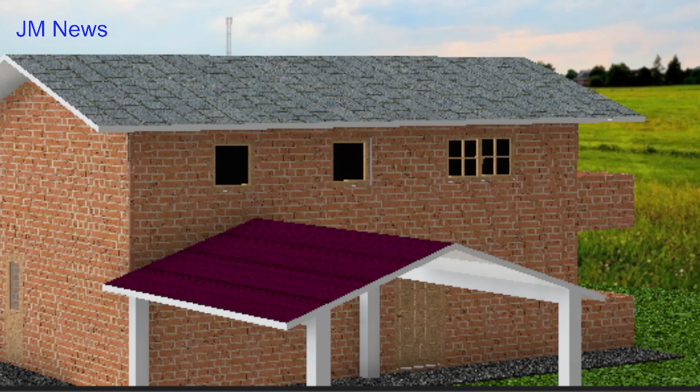Today we will teach you how to install a TV antenna on the roof of a family home. To perform the installation we will use a J-mount bracket, universal for antenna. So don't miss out on the content of this video.

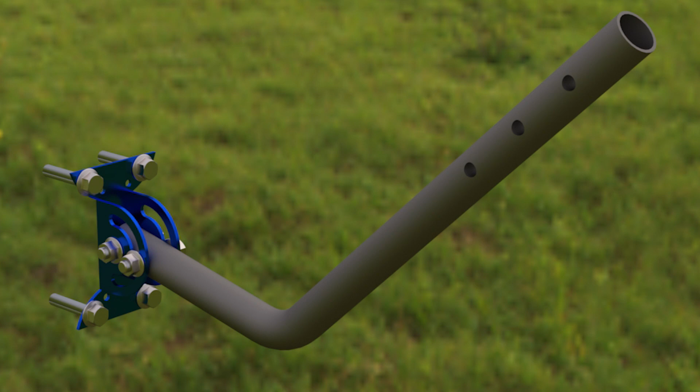This installation will use a universal antenna J-mount bracket. One of the advantages this J-type support allows us is that we can orient the antenna more easily.

The steps we will carry out for the installation of the universal J-type support on the roof are the following. First step: we will make a cardboard template, taking the sample from the base of the J support. Let's see an example of the base made with cardboard. We make the 4 holes to facilitate the work when we use the electric drill to make the holes in the roof of the house.

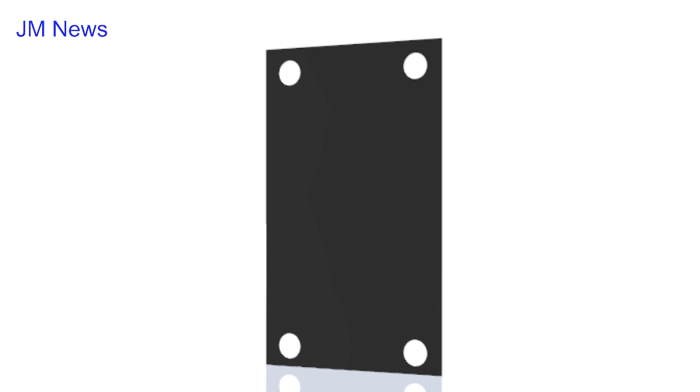Second step: it consists of placing the cardboard template in the area of the roof where we will place the J-type support. Next we will use the electric drill with the appropriate wall bit for the expansion bolts we are going to use. We will make the 4 holes indicated by the template.

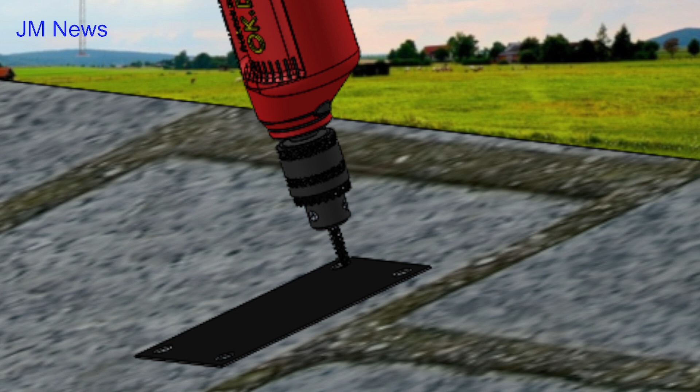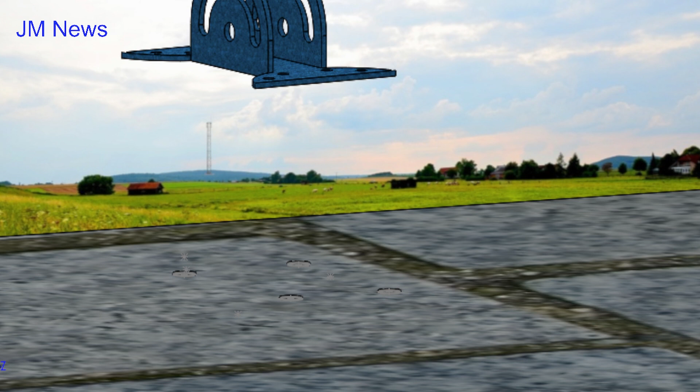Third step. A: we place the lead expansion anchors we have. B: we take the base of the J-type universal support and locate it where we marked the holes. C: finally we place the 4 hexagonal head screws and tighten.

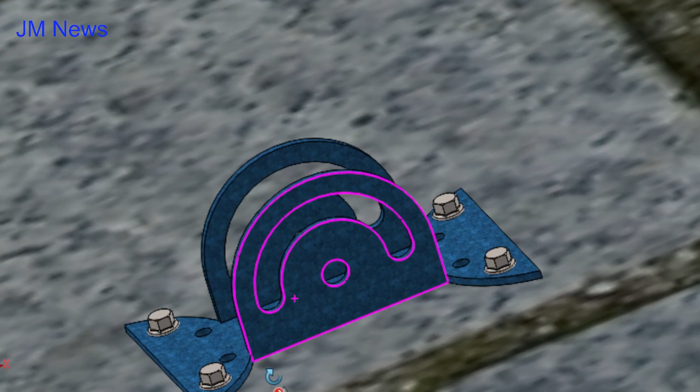Fourth step: we selected the J-type tube, which is approximately 20 inches long. Locate it on the base rail. Put the bolts or screws together with their nuts. Now perform a movement test of the J-type bracket.

Fifth step: for this installation I will use a 6-element UDA Yagi antenna with a gain of 12 dB.

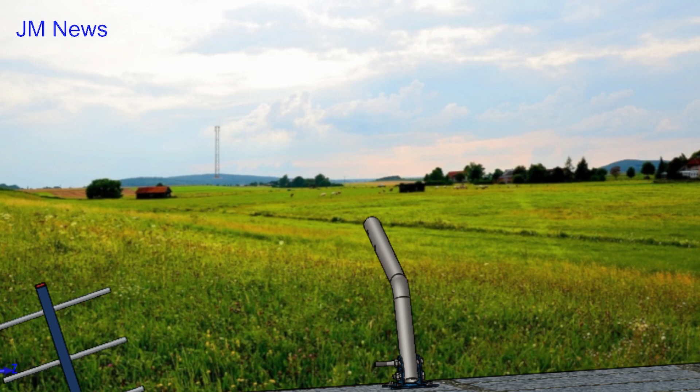We will take the antenna and place it on the J-type tube of our support. We will aim the antenna towards the nearest repeater tower. For this we adjust the antenna, moving it where necessary. Finally we secure it in the right direction.

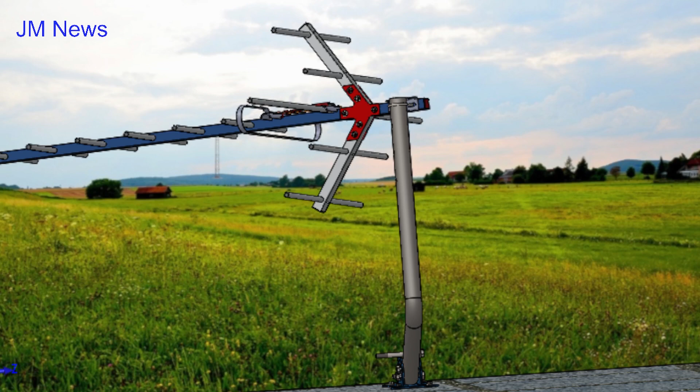In the next chapter we will make the connection of the antenna with the TV.